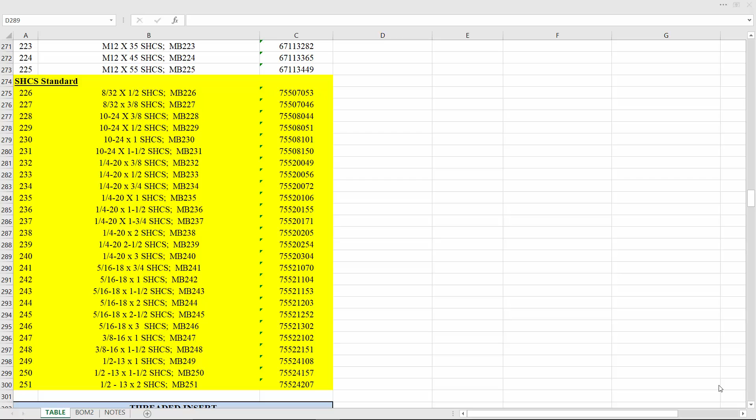So in our socket head cap screws, our first task, very parallel to what we did in the first video, is we've narrowed it down to the sizes and lengths that we really want. You'll notice we have 6 sizes, a few lengths for each one, but no information.

We're going to go into the Toolbox configuration tool, and you'll notice that when we hit length, all the lengths for all those sizes are still in play. We're only going to want to edit the ones in our list.

So we're going to highlight in the table below lines 1 through 26, shift select, and we're going to export that data. Let's open it up in Excel.

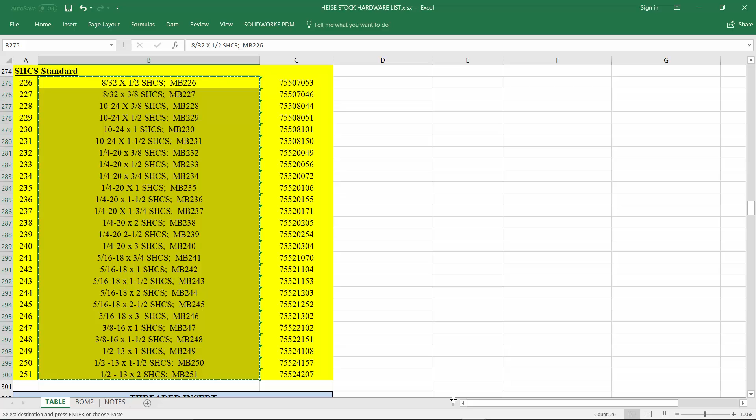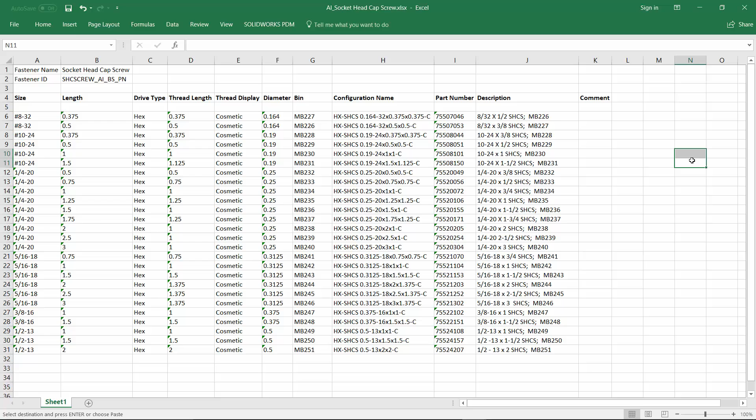Paste it here—again, a little bit of manual editing. With the descriptions updated correctly, we save it off, save our changes.

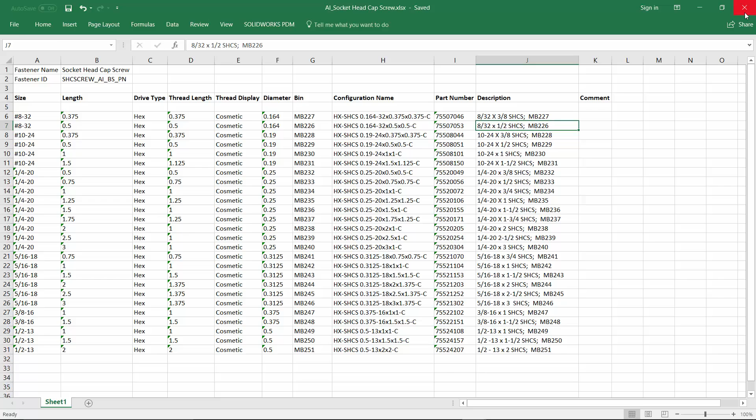We go back to the configuration tool and we import our edits. We now have descriptions, part numbers, and our bin numbers.

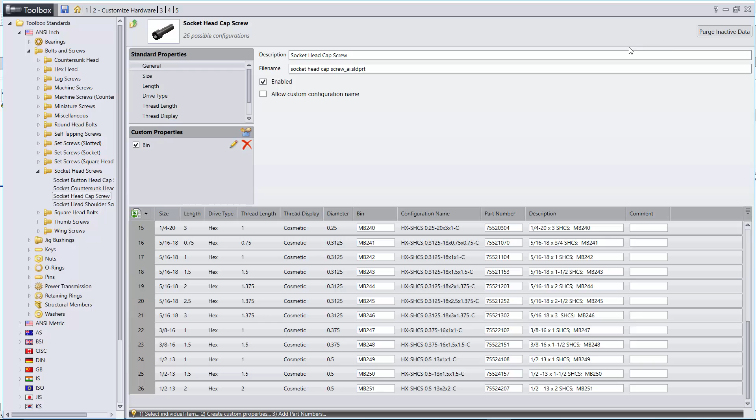And we're ready to fly. All the information is automatically brought into the toolbox. All users have to do is pick their size and their length, and all the other information propagates through.

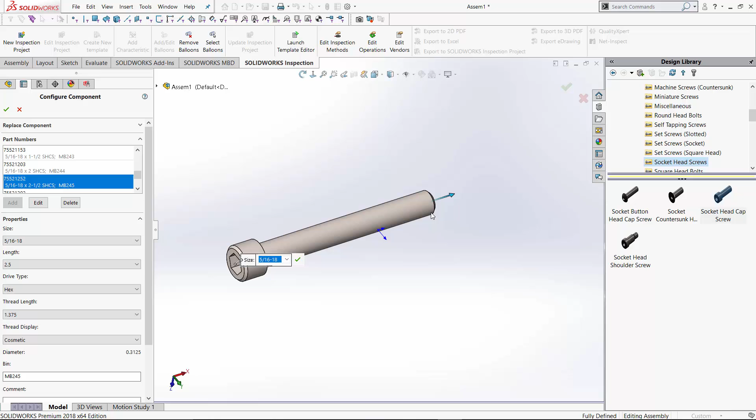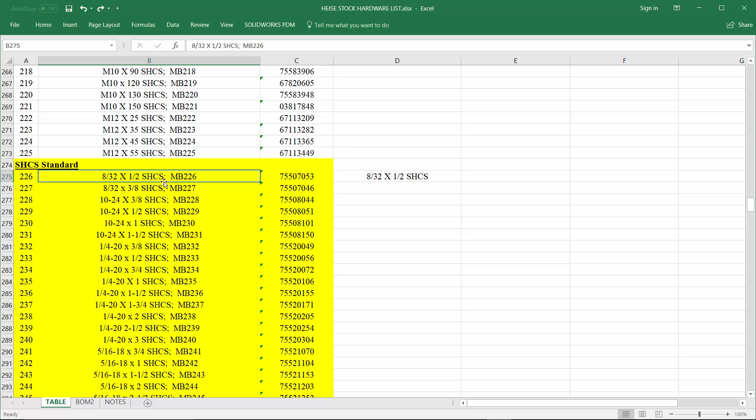Now, since we added bin numbers, we might want to come back and say the description is really concatenated with a description and a bin number. You'll notice here that we removed the MB226, and we did that just using Excel, a replace function—we found the semicolon and removed everything after it.

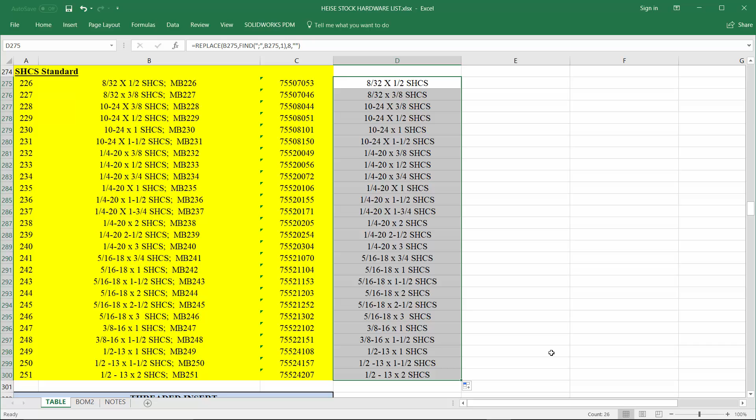So the formulas in Excel are very helpful for doing this type of work. With the formula in play, it's just Excel, copying the formula to the other ones. And to truly get our descriptions correct, we would just copy it back in and paste it.